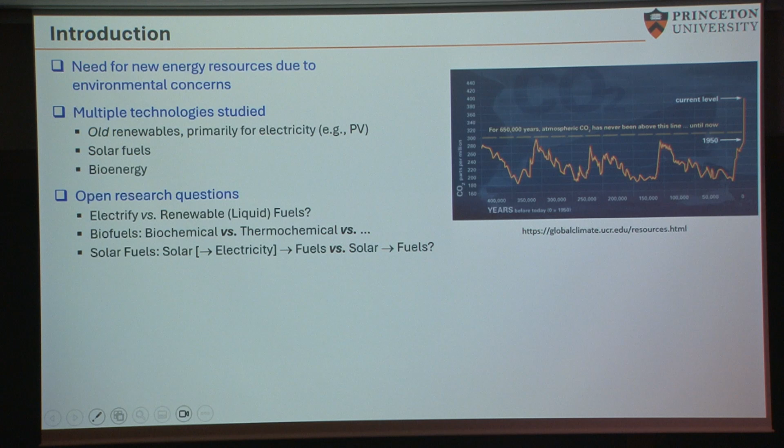So in this audience, I don't have to motivate too much why we would like to study renewable energy technologies. Many years ago, we would have added here also national security and increasing oil prices, but since 10, 15 years ago, I was always arguing that it is really environmental concerns that necessitate that we study this type of energy systems and technologies. And of course, this has been recognized by a wide range of scientists and engineers, and there is a lot of research going into the development of these new technologies, starting from what I would say old renewables, for example, photovoltaic or wind, to solar fuels, biofuels, and so on and so forth.

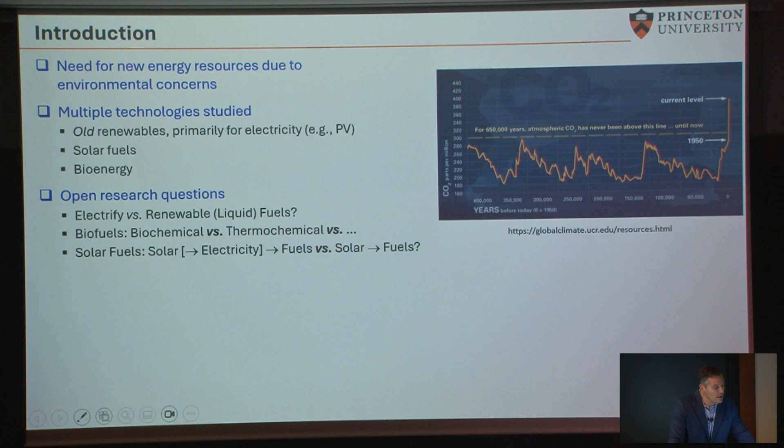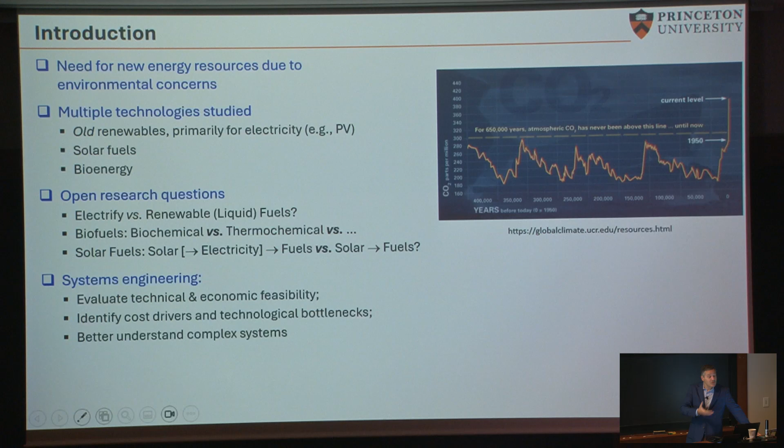But despite this wealth of research in this space, I would also argue that there are many, many open questions, and here I have listed some of them. For example, if we go beyond light vehicles, would it make sense to try to electrify or continue using liquid fuels? And then if we choose, let's say, to go with biofuels, which platform is better to convert biomass to a form of liquid fuel, and so on and so forth. So my main message today is that systems engineering helps us think about this type of questions, frame these questions, sometimes give some answers, but even understanding is important if we don't obtain definite answers. And ultimately, we would like to use these insights to guide future research efforts.

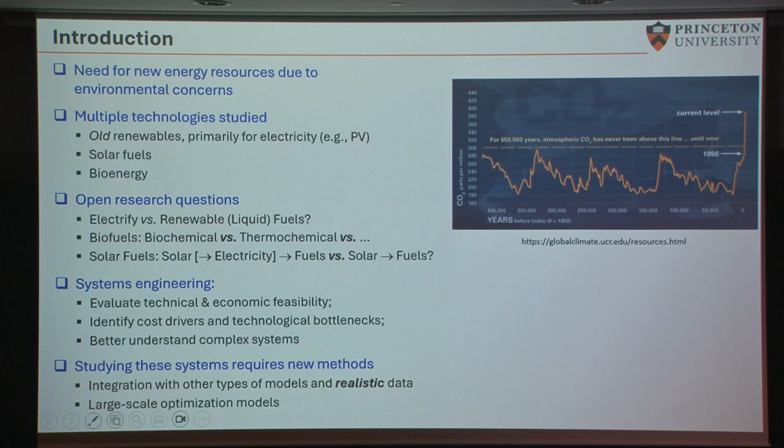Also, in our group, we spend a lot of time thinking about the new methods that are required to address the new type of problems. But I won't be focusing on this today. I'll just maybe have a couple of slides to highlight some of this method development. So this is the outline of my talk. Because of the very wide background in the audience, I've chosen to talk about three different vignettes. So some of my slides are a little bit dense. But again, I chose to give three different examples after I have introduced the methods that we use, with some preliminaries about what I'm calling here optimization-based process synthesis.

Before I start with the preliminaries, I'll just say that in general, systems engineering can address many different types of questions. It can be divided in terms of areas, but also in terms of types of questions. And I would say at a high level, there are three types of questions that we are trying to address. Design questions, so these are questions that concern very long-term horizons. How would we design a new facility that utilizes biomass? That's a 30-year kind of decision. Then there are operational questions. How do we operate a system? Here we're talking about days to weeks, maybe to months.

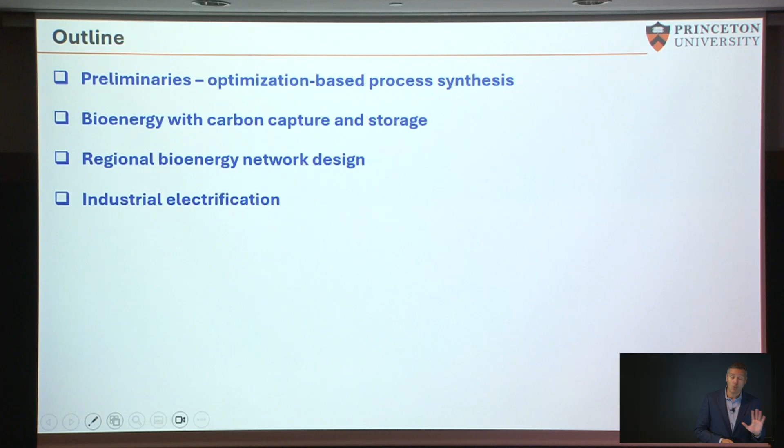And then finally, if we're thinking about an electric grid, we have control problems, right? And here we're talking about seconds, right? Seconds and minutes. The decisions have to be made in real time. My talk, for the most part, is going to be based at the first level, which is design, long-term decisions. So how do we design

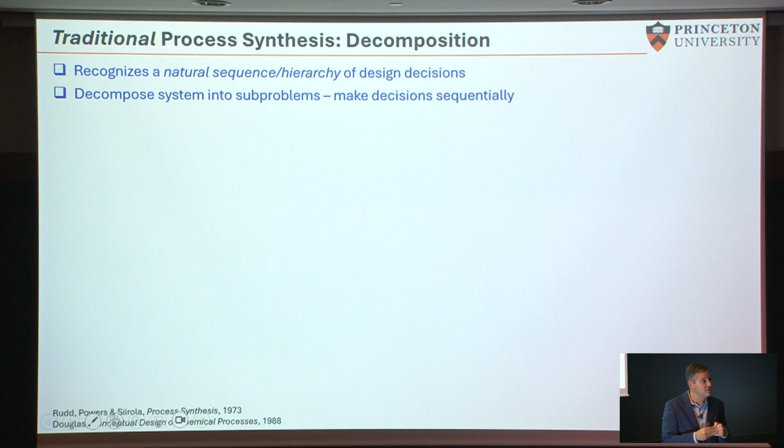these systems? Traditionally, we have tried to decompose these problems into smaller problems that we are kind of better equipped to address. I'll give an example in chemical engineering, but I'm pretty sure that similar sequences are present in many other disciplines. So in chemical engineering, we're essentially trying to get some new chemistry and design the system that would allow us to employ this chemistry at large scale.

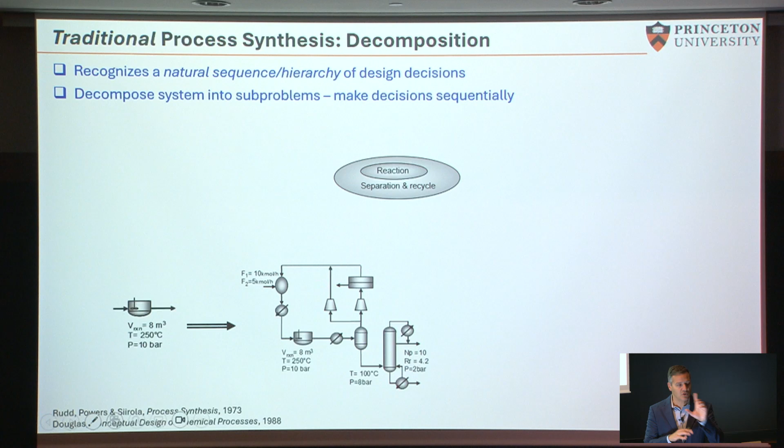So we start with the heart of the system, as we call it, which is where the chemistry happens. We have to decide what type of reactor we're going to employ. The details here are not important. We make these decisions. Then around that, we will have to make sure that, for example, the feedstocks are not wasted, so we have to recycle them, or our final products meet some specifications, right?

When we go to stores and we buy some plastics or all the everyday products that we use, they have to meet certain specifications in terms of purity, right? So this next layer of decisions is going to ensure that these specifications are met. And finally, we optimize energy. This is very intuitive for the chemical engineers in the audience. It almost mirrors the curriculum in our undergraduate education: a reaction engineering course, then separations, then unit operations.

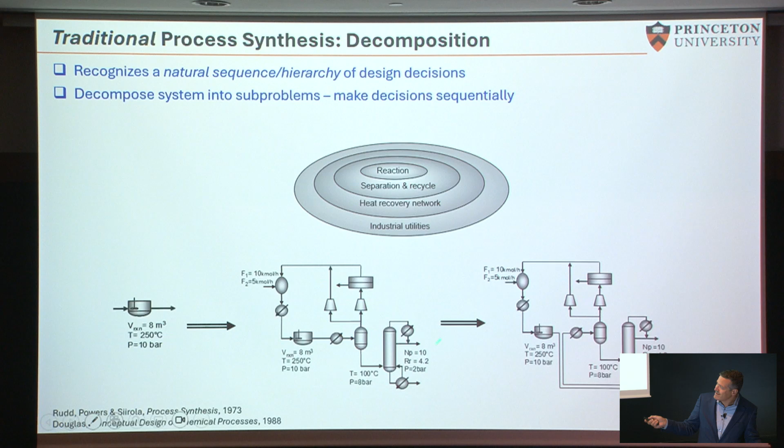This is great. This is very intuitive. It leads to good solutions, but it can also lead to very suboptimal systems. Just to give an example, we may design the system in such a way that is, yes, optimal from a reaction standpoint, but then this problem becomes extremely difficult and actually has no good solution. I'll be happy to give examples later.

So what's the alternative? What we use in the group is what we call superstructure optimization. What I'm showing here, again, is just a sketch, not meant to be fully understood. A superstructure is a network that contains all the different alternatives that could be designed for a given facility. Not all of these pieces are going to be part of the final solution, but we don't know that at the beginning. So we come up with this structure, which has all the alternatives.

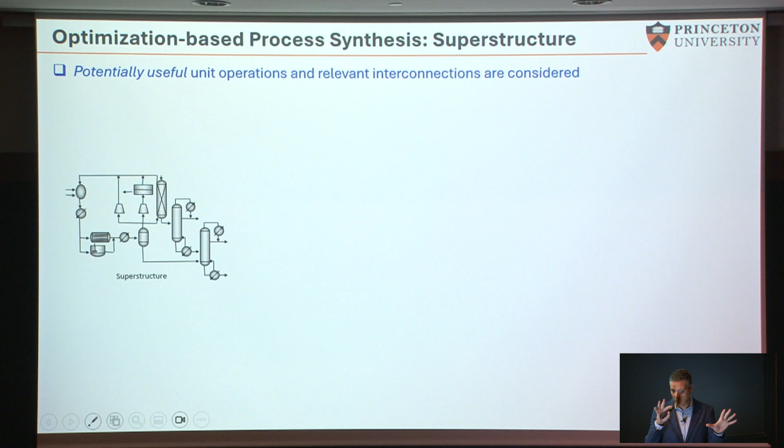Then we formulate a model. That's one of the two slides where I'll have some equations. This model is an optimization model. There are some variables here, these x's. These are the variables that we want to find, maximizing or minimizing a metric of choice. This can be minimize cost, minimize environmental impact, a combination of the two. Many different things can be used for this function.

The tricky part, and what makes this model very interesting, is that it has binary or Boolean decisions. You can think of them as true or false, right? These xb's are either 0 or 1, and if a variable is true, then the corresponding unit is going to be present in the final structure. Once we have identified the structure, we can calculate the costs, the emissions, all the other information that we would like to obtain.

Okay, so this seems to be very good, and it's kind of too good to be true, indeed. The reason is that there are three very important conditions. The optimal solution has to be embedded in the initial superstructure that we postulate, and this can be challenging. We should be able to develop this model, which can also be challenging. And we have to be able to solve this model, which is very challenging. So this is where the methods development goes.

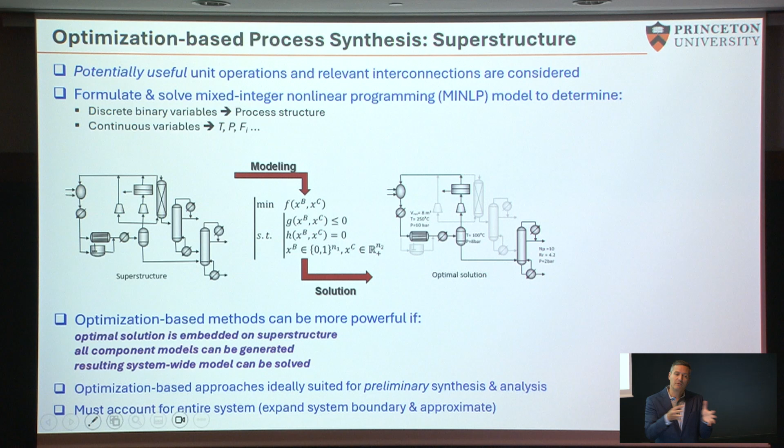Typically, we collaborate with some colleagues, they provide us with experimental results, then we build these models, and the results of these models are not meant to be used, let's say, to go ahead next year and build a facility. It's more to identify the trade-offs. It's more to understand the drivers of these systems, okay? So typically, we would get some results, we would go back, there's going to be back and forth, and during this process, the models will be improved.

Okay. So the first small story I want to share is about carbon capture in systems that convert biomass, specifically lignocellulosic biomass. This is often referred to as second generation biomass. The reason we study this type of biomass is because we do not compete with food. So it's not corn ethanol, essentially, it's everything else that will not compete for land with the food sector, but this type of biomass is more difficult to convert to fuels.

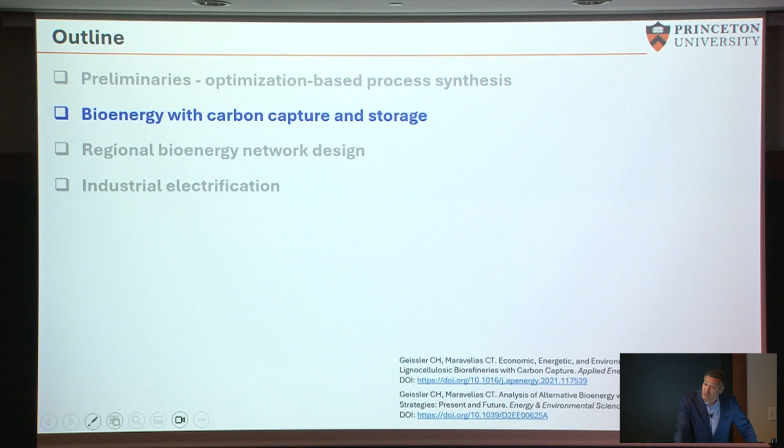And specifically I have added carbon capture, which is a theme that many people are interested in, but this question becomes very complicated. So I'll walk you slowly through this very busy slide. The gray blocks are the technologies that can be employed to take us from biomass to ethanol. 4 major blocks: pretreatment, hydrolysis, fermentation, and some separations. The block arrows represent flows.

The gray is carbon flow, so the first thing that we will notice is that if we want to make, let's say, a certain amount of ethanol that contains 1 mole of carbon, then we have to start with significantly more carbon in the feedstock, for reasons that are related to the composition of biomass. So what happens to the remaining carbon? Most of it actually ends up as carbon dioxide, but there are 3 point sources.

There is a source in the fermentation that is very concentrated. It is almost only CO2, and that would suggest that if we capture this stream, it's probably going to be relatively inexpensive to do that. But there are some other streams that contain carbon dioxide, and these are more dilute. So there are multiple ways to do carbon capture in a biorefinery, right? And here are the emissions of carbon dioxide depending on the selection we make.

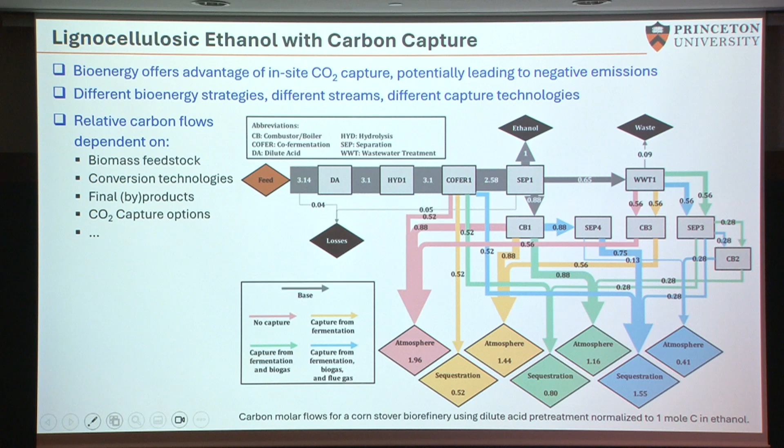At a very high level, if we don't do anything, then most of it, 1.96, is going to end up in the atmosphere. And as we try to do more capture, less CO2 ends up in the atmosphere, but the system now is more expensive. And because energy is required to do that capture, at some point it might not even make sense to do capture. So that is the question. I won't go through the details, just to illustrate the complexity of the system.

And since I have already talked about superstructure, that's a superstructure of a lignocellulosic biorefinery. All these light blue blocks are alternatives for pretreatment. We don't know which one would be optimal. These are alternatives for hydrolysis, alternatives for fermentation. So in an optimal solution, only one of them will be chosen. And what about the capture? Well, the capture is captured in this block.

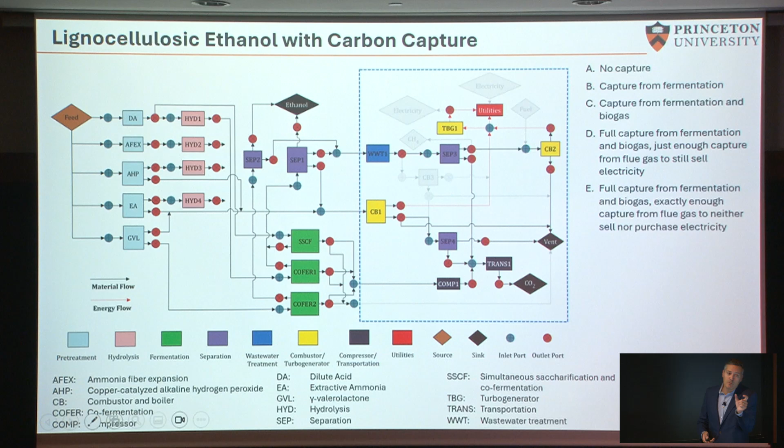If we choose to do nothing, we just let all CO2 go to the atmosphere, then this would be the configuration. As we try to capture this CO2 from more and more streams, the configuration of the biorefinery changes. So I'm using a letter code to simply indicate that there are different ways to design this system, A, B, C, D, E. So let's go directly to the results now.

This is a heat map. Every point is the result of a single optimization, okay? The optimization is going to return a lot of information, but at the end, the one metric that we're going to use is the cost of the ethanol we're producing. So we are running an optimization with two important parameters fixed, or with two assumptions, you can say. What's the credit that we would obtain if we were to capture CO2 in a biorefinery? And what is the capacity of this biorefinery?

Let me start with the y-axis and why it's important. In engineering, and that's also true in process systems, the capital cost per unit of production goes down as we build bigger systems. That's what we know as economies of scale, right? And in all the systems, again focusing on chemical engineering, that have been built maybe until the early 2000s, or 99% of the systems, it was always good to build big, right? Because we wanted to exploit economies of scale.

So let's say in the Gulf Coast of Texas, the price of a tanker of oil would be the same whether it would end up in a big refinery or a small refinery. So why not build a big refinery, right, to have economy of scale? In these biorefineries, it's a completely different kind of calculation, because as these biorefineries become bigger, the biomass would have to come from farther and farther away.

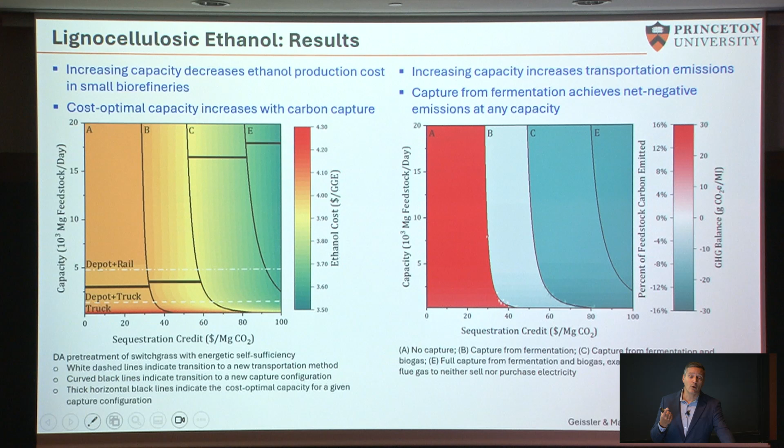These solid black lines show the optimal capacity for the given technology, right? So this is like the trade-off, the best point in terms of capacity when we don't do any capture is a very small biorefinery. But once we do aggressive capture, then the optimal scale is very, very different. And this is exactly the same calculation, but here I'm showing another metric, environmental impact. The environmental impact would not change as the cost changes. It would be the same for each one of these different configurations of the biorefinery.

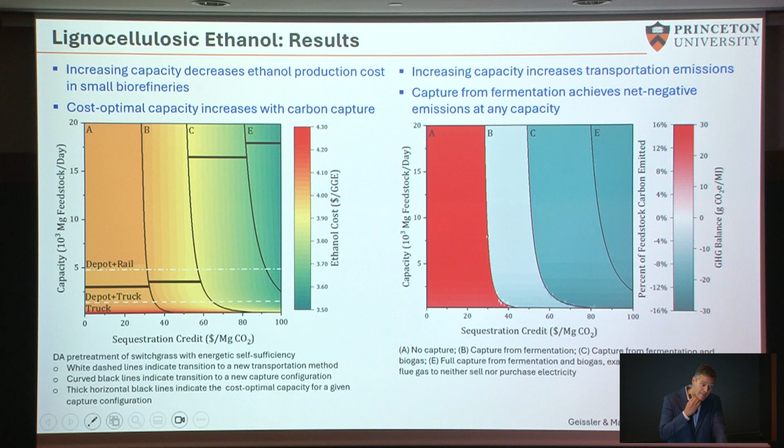Okay, so this was when we're converting biomass to ethanol. And this is typically done microbially. And there is a lot of research actually also on campus in this space. But biomass can be used to do many other things. Again, another busy slide. I'll try to explain at a very high level what we are showing here. So what we are doing in a biorefinery can be microbially converting biomass to ethanol.

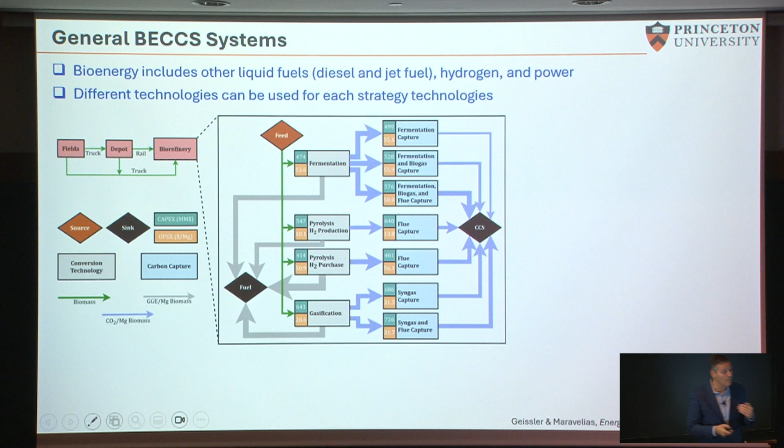That's one option. But we can pyrolyze biomass, we can gasify biomass. We can gasify and go to diesel instead of a gasoline component, which is ethanol. We can gasify and go to jet fuel potentially. We can use it for electricity, we can use it for hydrogen. There are many things that we can do with biomass. So here, in what I'm going to be showing next as results, we are trying to do the same analysis, but picking the technology that is optimal across a larger palette of technologies.

The carbon flows also become a little bit complicated, so I just wanted to very quickly go through this figure. So we have emissions due to harvesting and transportation, that is not always clear, right? To grow this biomass and bring it to the biorefinery, we're going to have emissions. If we choose to do capture, then we will have sequestration. But when the biomass grows, it also sequesters organic carbon, so this also has to be taken into account. And then we produce our product to meet this demand, and there are going to be emissions by using that product in the case of liquid fuels, but not in the case of electricity.

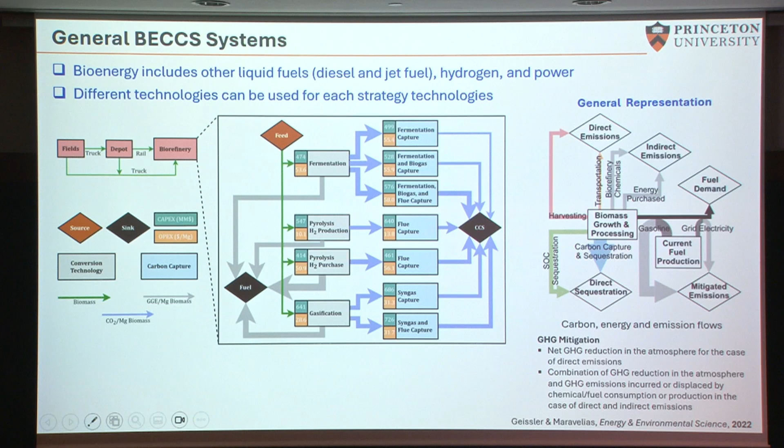So these are the results for most of the technologies that we would like to consider, and the naming convention here is very important. The first part of this name is the platform: pyrolysis, gasification, fermentation, the three major ways to convert. The second part is, are we going to use, for example, electricity from the grid if we want to do carbon capture? Or are we going to sell electricity? So the second part indicates our interactions with the grid. The third part is what we make, liquid fuels or hydrogen. And then finally is how we do capture.

The main finding of this study, in some ways not what we expected, not what we hoped necessarily, but that's what the analysis showed, is that gasification technologies have the highest greenhouse gas mitigation potential, which was a little bit surprising, but that was the case.

Okay, and this is the same map, the same heat map that I showed earlier, that shows what's the optimal technology as a function, again, of sequestration credit and capacity. Again, the main thing is it's very different, right? And as I will be showing later, even location sometimes is very important. So there is no one size fits all in this space.

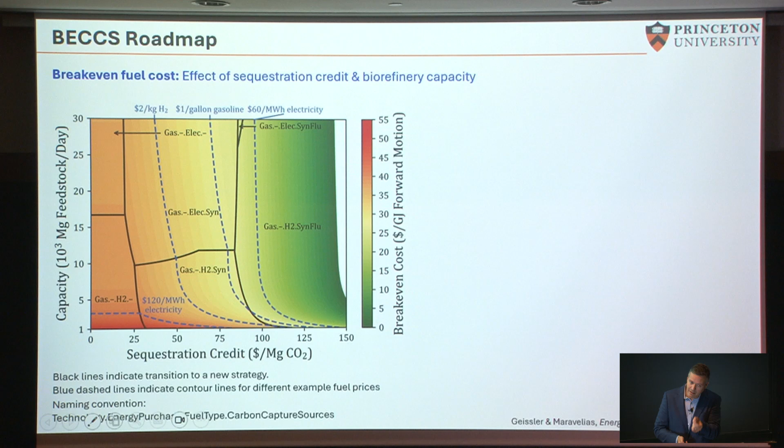So these were the main findings, that gasification to electricity or hydrogen is preferred over any other technology. The insight here, again, it was not what we were expecting, is two things. Many times the analysis has been done on energy in the final product: what's the best technology in terms of energy in the final product, ethanol, diesel, gasoline, electricity, without taking into account motor efficiency. The electric motor is much more efficient than a diesel engine.

So if we do the analysis in terms of displaced fossil fuel, that's why gasification to electricity is very, very promising, because the electric motor is very efficient. So the same amount of electricity versus liquid fuel would lead to very different displacement of fossil fuel. And hydrogen is there because we do not emit when we consume it, as opposed to ethanol.

Yes? So these calculations for the sequestration credit, is it a fixed value through your optimization? Do you have considerations where the credit might change? Not in these results, but we have some recent work where we are considering that. In this case, these are like snapshots as if we were to design the biorefinery today. In these other models, we now also introduce the possibility of changing our decisions over the horizon because the credit changes or other considerations.

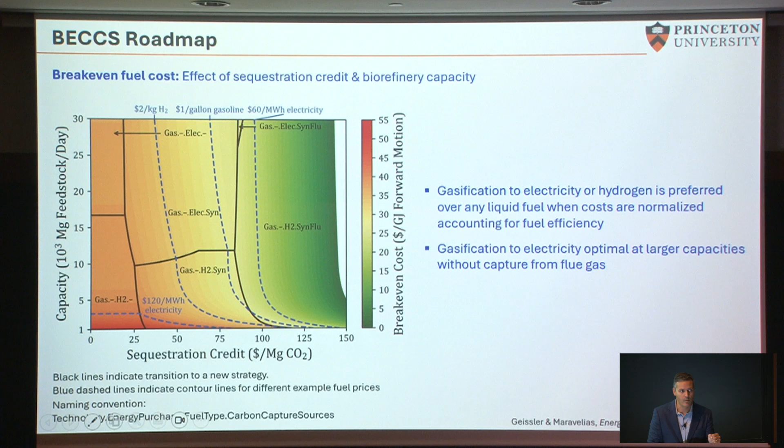Okay. So let me now move to this project. It is a continuation of the previous project, which very conveniently had ignored or approximated the spatial aspect of biomass. So what's the motivation here? We had made some assumptions about the emissions and transportation cost as a function of distance, and that was it in the previous analysis, which is a reasonable first assumption, but as you will see, it does not account for an important aspect. So this becomes now a supply chain problem.

Some of you are familiar, but I just wanted to very quickly introduce what is a traditional supply chain. So we're thinking about Amazon, a big manufacturing facility, and we try to come up with the optimal network, the optimal supply chain to deliver goods to the customers. Some of the assumptions in most of these problems are that we know the raw materials, we know what we need to make our product. The raw materials are sourced from a point, a facility of our vendor. The quality is relatively constant, ensured by our vendor, and we already know how we are going to deliver these materials. So a distribution center would be in a city, right?

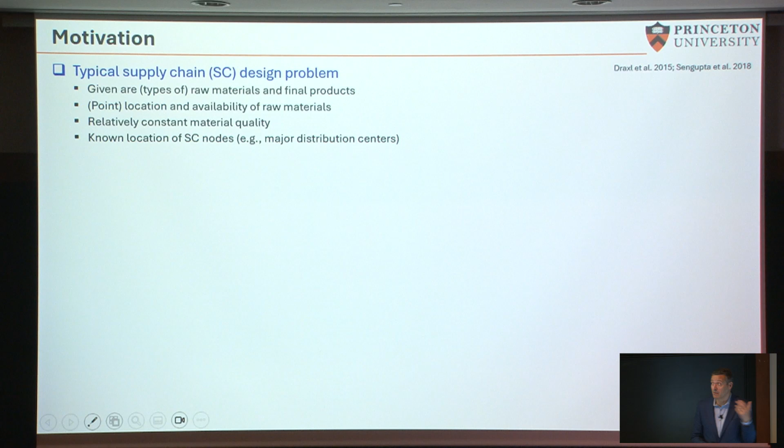Biofuel supply chains are quite different. Here is real data from Michigan. Our collaborators were in Michigan. The raw material is geographically highly distributed. One thing, it varies with time. If we had a drought year, or a year that the weather was somehow different, the yields are going to be very different. The lands, we don't know yet which of these lands we're going to use, because these crops have not been established, and really here our goal is to understand these systems, right? And as I already said, there is a lot of variability in our feedstock.

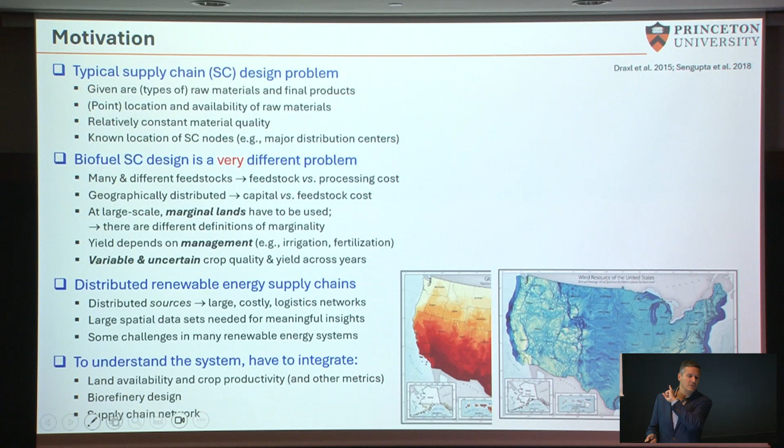So this is a feature, the geographically distributed nature of the primary resource, not only in the area of biofuels, but this is a map with solar irradiance, similar picture for wind energy. So in order to get a better understanding about the systems, I would argue that we have to take into account land availability and crop productivity, then go to biorefinery design, which I have already discussed, and then put everything like in a network, regional, very large scale network, and try to understand the systems.

So we are very lucky we collaborate with some colleagues from the University of Wisconsin and Michigan State University that help us gather all this data and then plug it into our models. So in land availability, the question is, what is marginal? It's a term that is not used very widely these days. Bioenergy land, bioenergy appropriate land is another term. But these are all different types of lands, formerly irrigated, conservation lands, that can potentially be used for biomass.

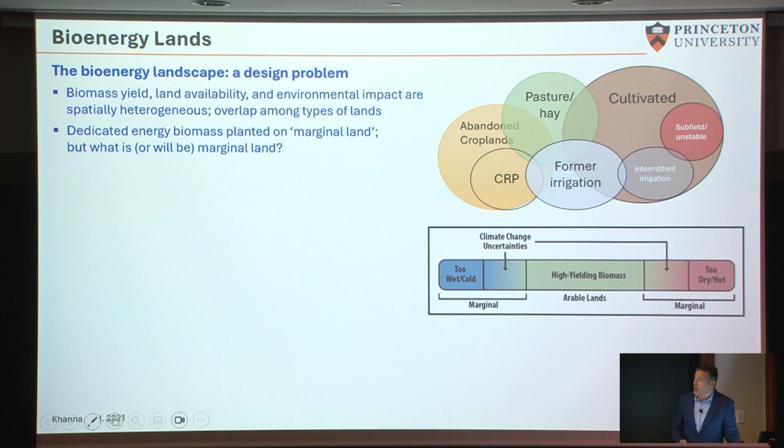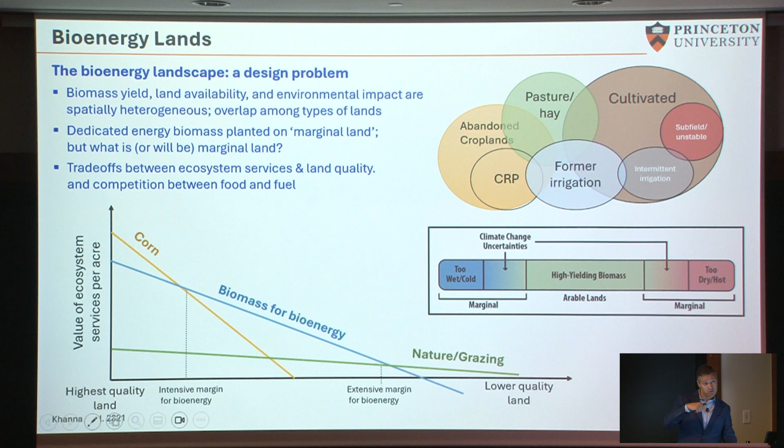And there is this kind of simplified graphic that says, if we have a very high quality land, then probably we want to use it for food. As the quality of the land deteriorates, at some point we would like to use it for bioenergy, and then finally just grazing. But these threshold values are very difficult to establish, and they will change with time. With less rain or more rain in other parts of the country, these thresholds are going to be changing.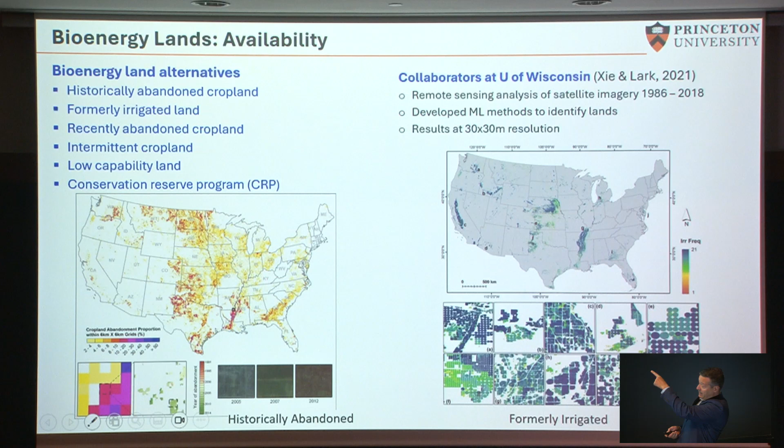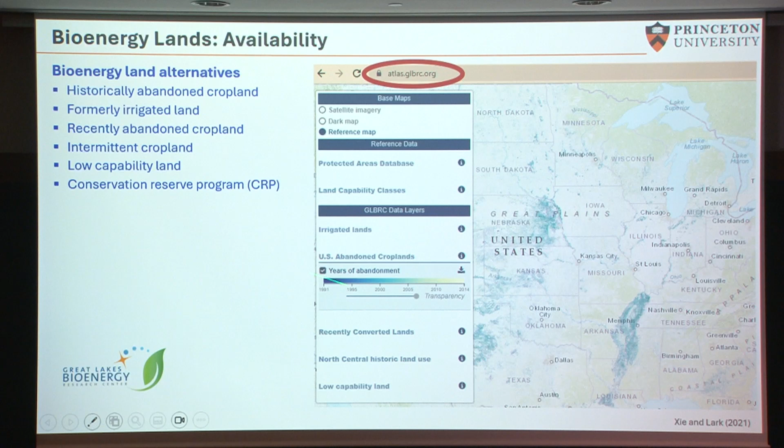Here I just wanted to show this, that's the imagery, and it's very clear that it was formerly irrigated. They have temperature sensors so they can see during irrigation season whether it is still irrigated or not, and then they have this imagery and they can identify these lands. All this information sits in this very nice tool. It's called atlas.glbrc.org, where you can go pick different options, like what type of land, years of abandonment, and it will automatically return the lands that can be used.

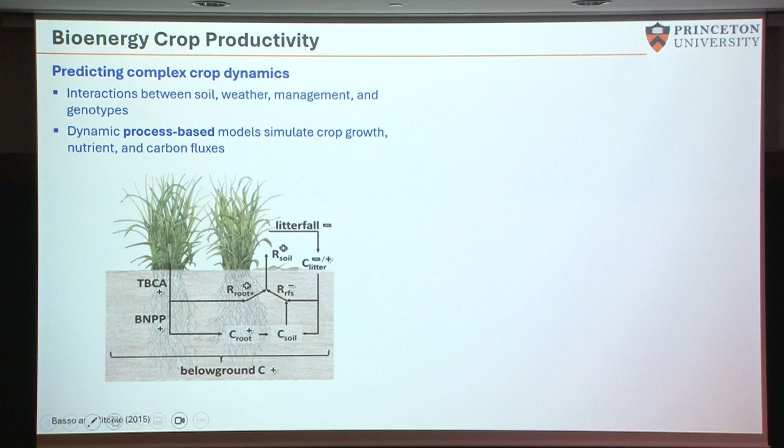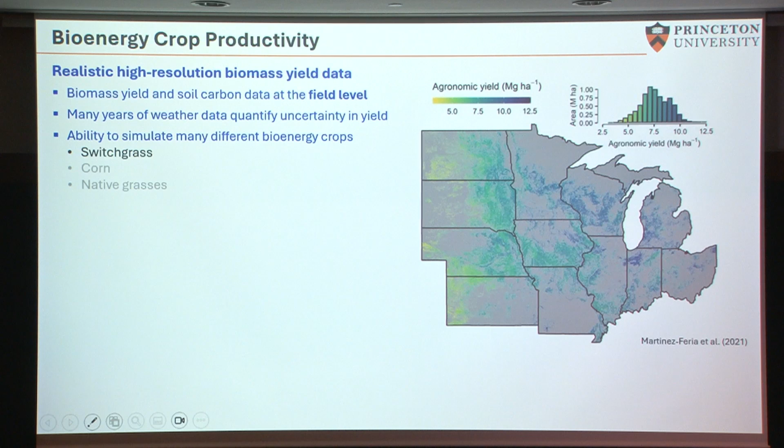Then this becomes input to these models, and I know a little bit, but again, it's not what we did in the group. Our collaborators at MSU have done that, where given weather data applied in these lands that I have identified, they can predict productivity, so that would be kilograms per hectare or tons per hectare, and some other outcomes, for example, soil sequestration potential. It is a nice analogy with engineering, but I'll skip it due to time constraints. So this is now the map that we can use. This is the yield in this region of 10 states in the Midwest, generated from our collaborators at MSU.

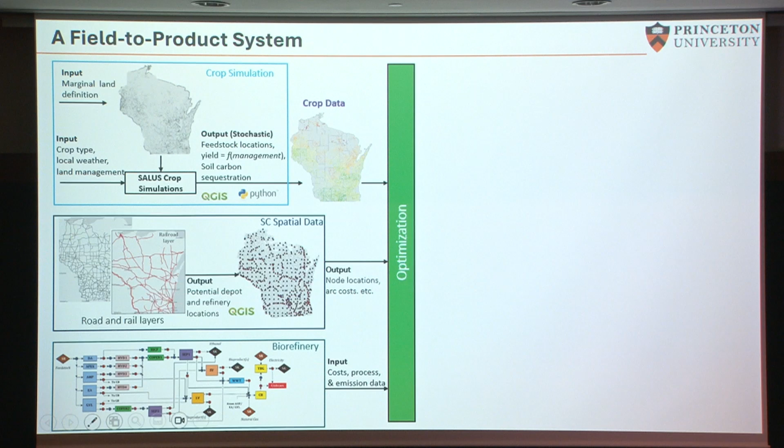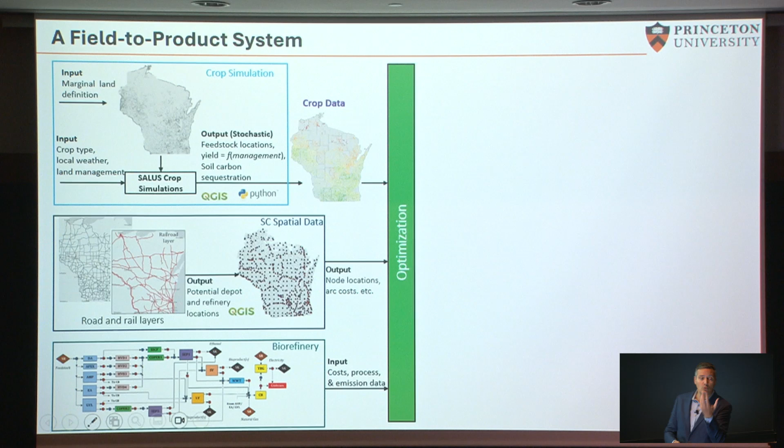Okay, so now, just the big picture. We have the crop simulation data, this is for Wisconsin. So we will have the information about productivity and sequestration potential. Then we are going to have some information about potential locations of biorefineries. And then what I have already discussed, this would go into an optimization. We will obtain some results. That's not very interesting. We were very happy when we did it. That is maybe 4 or 5 years ago.

But at that point, we could only study systems up to a state. So it's a little bit not very interesting solution. There is a refinery installed in Madison, that would be the idea, the optimal, with some depots spread around the state. Very small demand we were considering. But now this ignores completely that Iowa actually has very fertile lands. And if we had included Iowa, it would be completely different.

So the reviewers, many people complained. They said, no, if you want to get meaningful insights, you would have to go to at least regional scale, because then we would see the interactions. It's a very arbitrary boundary that we have drawn here, and say, find the optimal solution for this system. So that's what we did. Same people involved, we just did the calculations for larger systems. So this is the 8 states in the US Midwest using, again, real data. Real in the sense that the candidate lands were identified using satellites, and the calculations for productivity and soil sequestration done using these models of the agronomists.

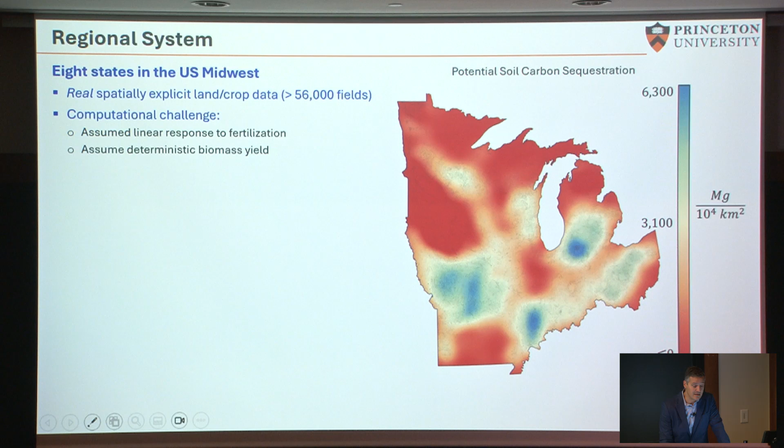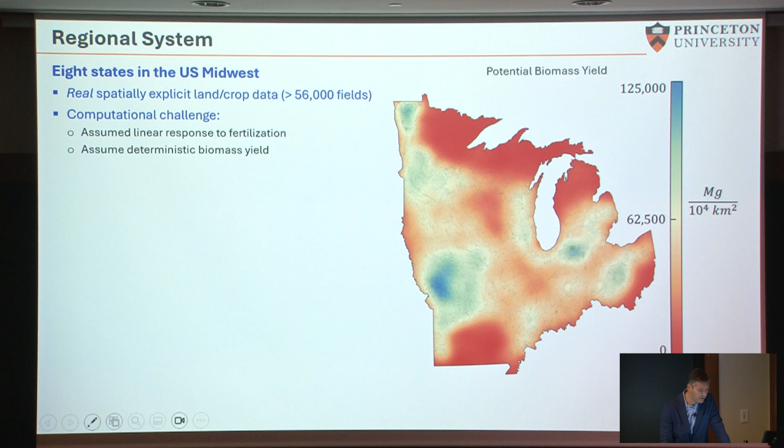So this is the potential for carbon sequestration. Bluer regions have higher potential. This is the yield. Bluer regions have higher yield per square kilometer. So that was one. And then we added on top of that some other information.

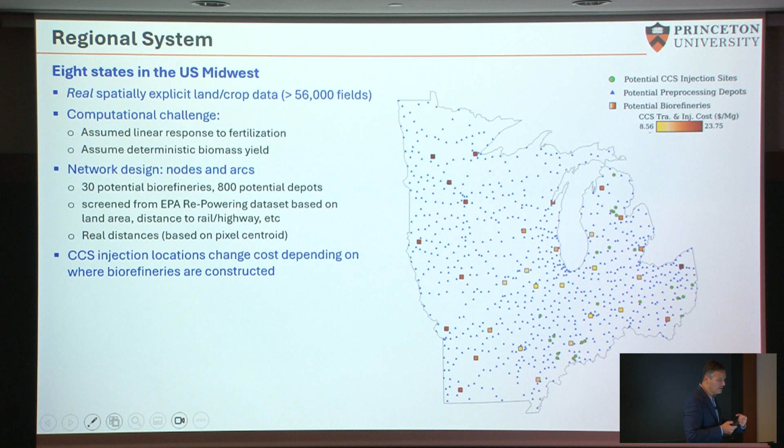So these are all the locations, the dots for injection. Based on the National Lab for Renewable Energy, they have identified some locations for sequestration. So these would be the different locations. And then we pre-calculated, if we were to install, let's say, a biorefinery here, which location would we pick? It's not immediately trivial because these locations have very different costs for sequestering. But we did that calculation beforehand, and now we were able to include these sequestration sites.

And then the other thing that was not included earlier, because we were focusing on ethanol, whereas now we are considering all the technologies, is the electricity grid. If we are producing electricity, then it is very important to see what electricity we are displacing. So in states where the mix is less renewable, it would be beneficial to use biomass to produce electricity. In states where the mix is already quite renewable, then maybe producing something else would be better.

So emissions and costs, and then these are the types of results that we could obtain. So now we see that we install, this might be around the Illinois and Wisconsin state line. So these would be the refineries that we would employ, and we would use pyrolysis. But this is when we do not account for the social cost of carbon. Big discussion, we can discuss that later in the Q&A.

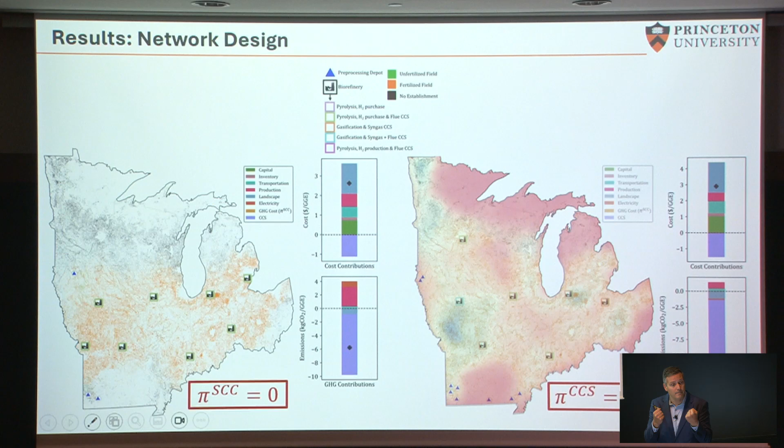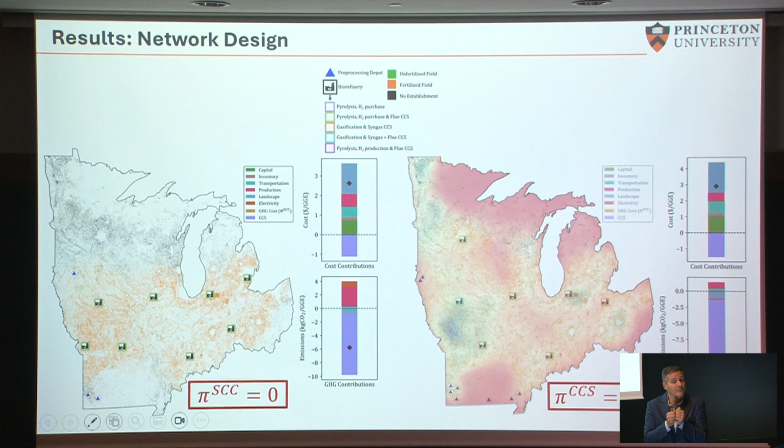Okay. What we see also is that, for example, gasification, these two colors, is chosen in areas where you have very high yield. The reason is that gasification technologies benefit tremendously from economies of scale. So we wouldn't want a gasification facility in an area without high productivity, because we would have to go very far away to collect the biomass needed for a large facility. So we choose to install gasification systems here, but very different technologies elsewhere. And then again, we produce electricity based on the mix in that state.

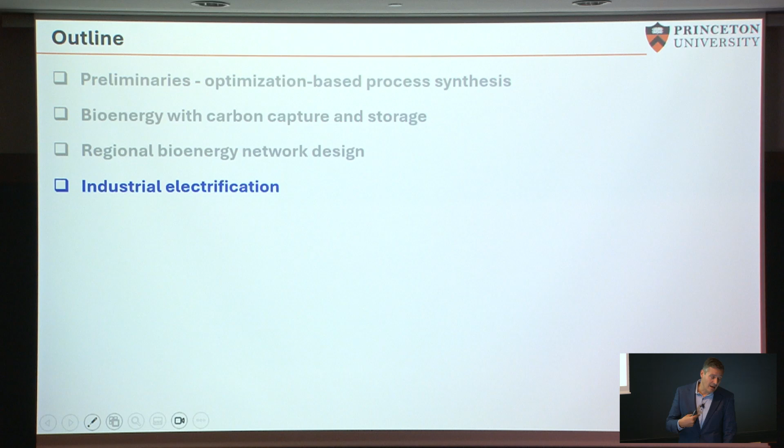Okay, so in the last few minutes, I'd like to talk about something very different: electrification. That's something we have become more and more interested in over the last couple of years. It's about industrial electrification. I'll go very quickly through this slide. These are different projections of the availability of electricity through 2050. Based on some optimistic projections, we'll have a lot of electricity. That naturally leads to the question, how can we use this electricity in addition to electrifying the transportation sector?

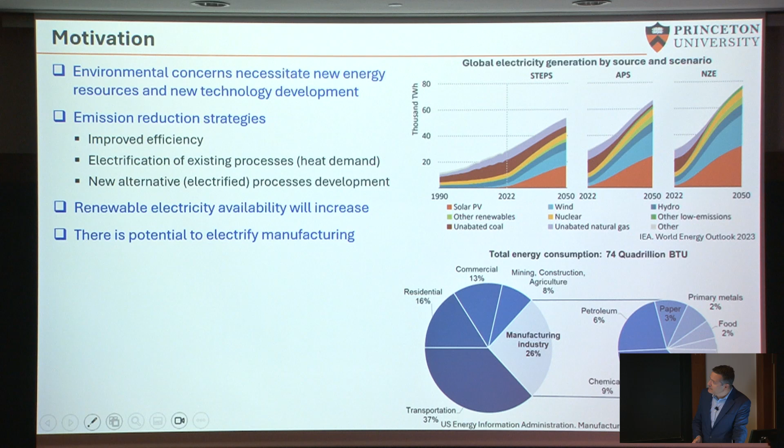A lot of research has gone into this area. People are starting to ask, how can we electrify this part of the energy pie, right? Transportation, we are moving in this direction, but also manufacturing. That's how manufacturing is subdivided. Can we electrify? There are studies asking these questions, but we would like to develop a general framework. So this is the question that we are trying to address.

Let's assume that we have a system, the details are not important. We have a process, we call it P1, and that's what we do today. It requires electricity, but also requires a lot of heating. Steel manufacturing and cement manufacturing would be big sectors that fit this description.

The first question is, when would it make sense to use electricity to meet this heating requirement? Today, probably it is not a good idea, but maybe it will become a better idea in the future. So when should we be switching, basically using electricity instead of natural gas for heating? And then another question, more interesting, is if we can come up with a new technology that fundamentally requires much more electricity than heat, as opposed to the first technology, when would we employ this technology? These are the processes and these are the questions.

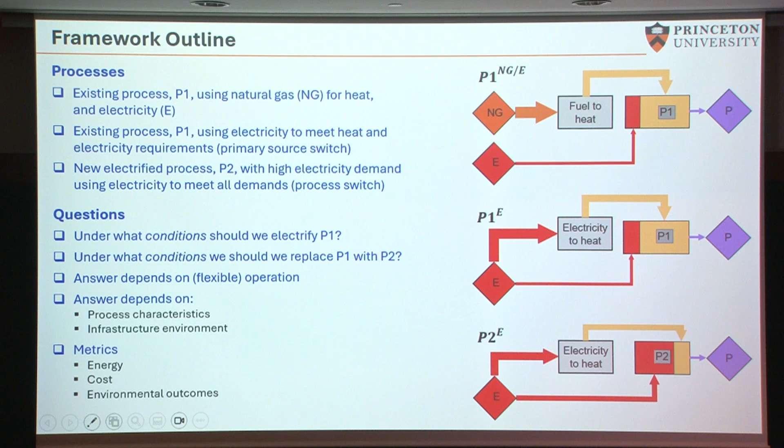Now, so far, we have assumed, and actually that's what we have been doing in the discipline traditionally, that once these systems are built, they operate as what we call steady state. They do the same thing all the time. But now, as the electricity grid is renewable at a certain time of the day and less renewable at others, we will have to start thinking also about flexible operation.

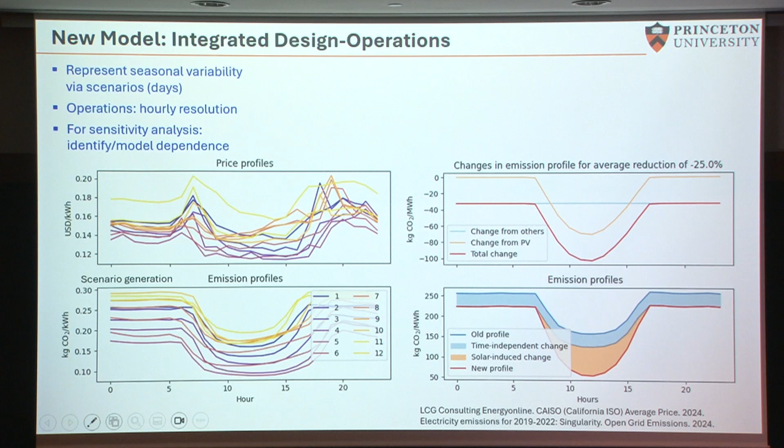Okay? So these are the 6 alternatives that we will be using. Traditional process, when do we switch to use electricity only? When do we switch to a new technology? We operate in steady state, or for all of these 3, we have the ability, which requires bigger capital investment, to operate them flexibly. Okay, so I will be using this notation. I think I'm going to just show here sample results.

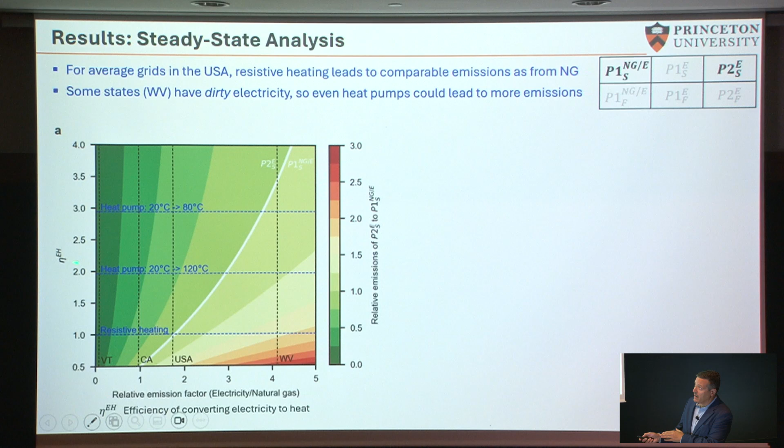So if this white line represents, let's say, the threshold for switching from the old technology to the new technology, depending on where we are and this efficiency, the switch is going to happen at very different combinations, right? So if we want to, let's say, provide heat at 120 degrees, this efficiency is going to be very high or very low. So depending on the specifics of this, what is the relative efficiency of the new process with respect to the first, that's this, and this is where we are. So that's the answer, and I'll skip that.

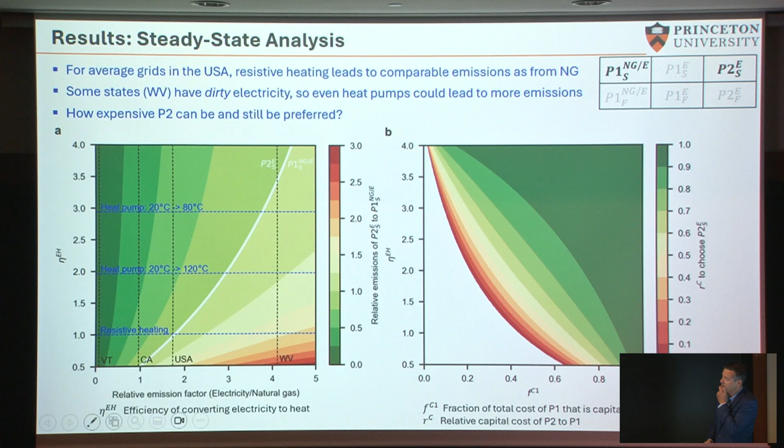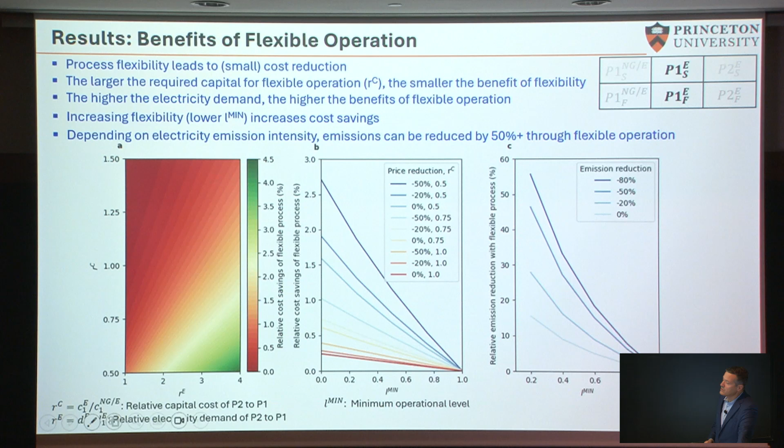Second to last slide, this now is the same kind of analysis, but now we're considering flexible operation. We allow the new process to be less than at full capacity. And what we see here is the relative cost savings if we allow this flexible operation. And what was very surprising, and in some ways a little bit different from some papers in the literature, is that the benefit is not that large, actually. The benefit from flexible operation is very few percentage points, 4%, 5%, which again was surprising. I'll skip this too because I'm running out of time. This is the last slide with results.

When I motivated this work, I said we would like to have a general framework. Right, a general framework that would allow us to address this type of questions. And here is one example. So these generic blocks that I described, P1 and P2, how we do things today is P1, how we would do things in the future is P2. We applied that for ammonia. So ammonia has very large energy demand, one of the most important processes.

This is how it's done today. It's steam methane reforming, so we use natural gas plus Haber-Bosch, this famous reaction, and we operate it at steady state. What would be the alternative? We use electrolysis to get the hydrogen necessary for ammonia, and then electrified Haber-Bosch. And we have operational flexibility, but we cannot turn it off completely. We can go down to 10%. So this is now how the electricity price would have to be reduced and what would be the reduction in the emissions to transition to the new technology, the electrified technology.

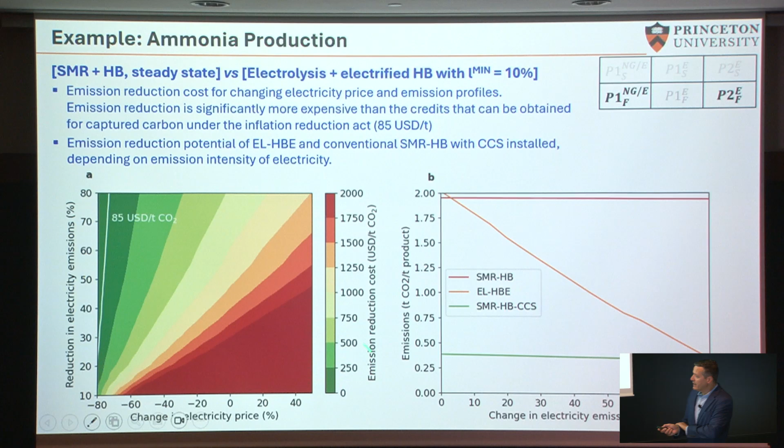What was surprising is that producing ammonia the way we do it today and then capturing CO2 is actually very, very competitive. That would be the emissions of this technology. So the main point here is that the electric grid would have to become significantly greener for the new system, the electrified counterpart, let's say, to become better than current ammonia production plus carbon capture.

So, just some concluding remarks. I hope I was able to convince you that systems engineering in many ways allows us to study these systems. I often get asked, are we ready to do it? Or can we do it? I think it's understanding, right? What I would argue is that it allows us to understand the systems and the trade-offs. I talked about these three different systems. These are the main takeaways: location-specific in terms of BECCS, location and time-dependent, and then the electrification. What was interesting is really that now we have to account for design and operations, these two scales that I mentioned at the beginning, at the same time.

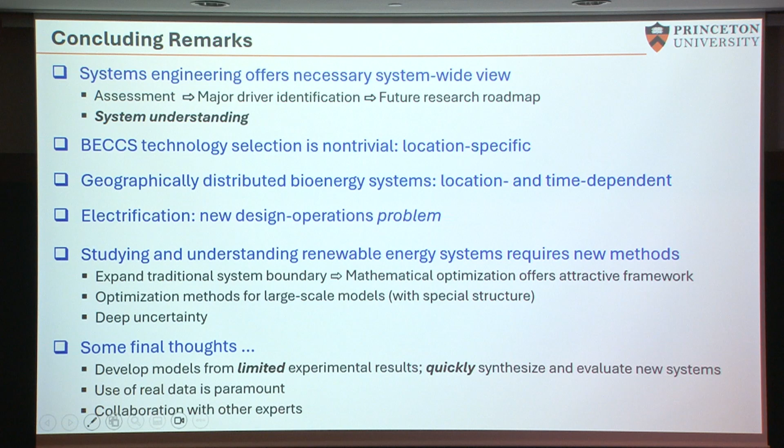All right. So for those of you on Zoom, I'm monitoring questions on Zoom over here. For those of you in the audience, the first question will come from a student or a postdoc. So wait, let's wait for the microphone so that the people on Zoom can hear the question. All right, I think this works.

Thank you so much for the super interesting talk. I'm just wondering, for the electrified Haber-Bosch ammonia production, did you look at islanded systems where you can stack all the Inflation Reduction Act incentives? Like if you build your own solar, wind, and battery storage, you stack all of that together. Does that change the economics, and is it more attractive that way?

So short answer, no. We are thinking about it, including battery or other forms of storage to allow us to have more flexible operation. Having, let's say, our own PV system to supply electricity would also increase the cost. It would increase the cost if we have batteries. So it's the same type of trade-offs, but maybe the results would be different. Thanks. Thank you.

Two questions near each other. So 1, 2.

Thanks so much. The question is about the map with the yield for bioenergy. I was interested because it went very quickly, but it looked like it was monotonically decreasing or increasing as you went southwest. Maybe it's the shading of the colors I didn't understand. It looked like there were gradations as you went along the map. I would have thought there was more heterogeneity.